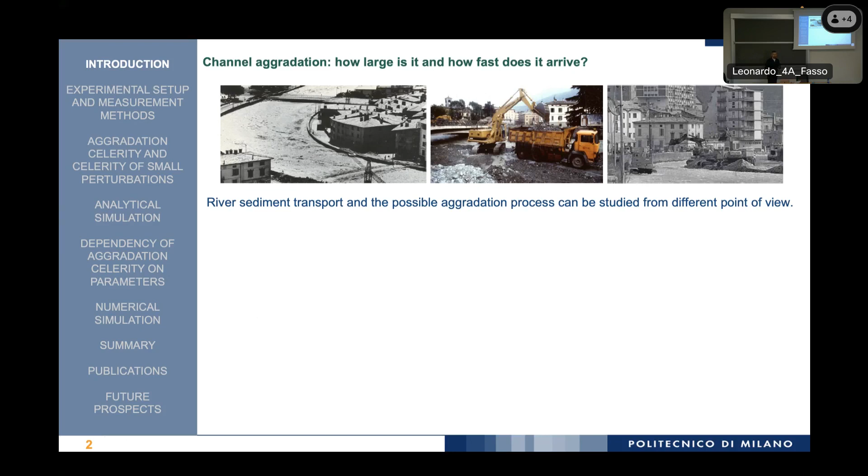These considerations and events like this highlight the importance of studying river sediment transport and possible aggradation processes. This study can be done from different points of view: mathematically, experimentally at microscopic or macroscopic scales, and so on.

What I'm focusing on is listed here: investigating the celerity of propagation of the aggradation wave and the celerity of small perturbations, analytically and numerically simulating the aggradation process, the dependency of aggradation celerity on controlling parameters, and the effect of the presence of sediment transport in a flow. All these investigations are done by performing aggradation experiments in the hydraulic lab of Politecnico di Milano in the Lecco campus.

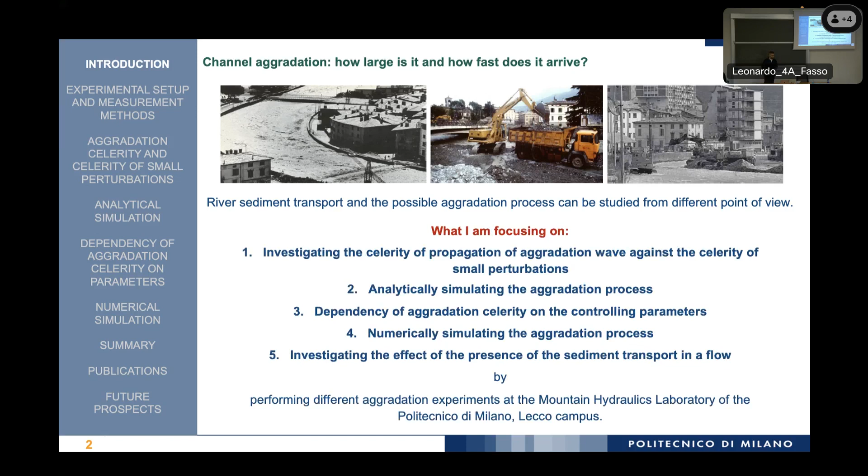Before going into detail with these investigations, I'd like to introduce our experimental setup. Our rectangular channel has an erodible bed with a uniform sediment mixture of PVC. There's a hopper, as you can see here in the upstream part of the channel, that feeds the channel during the experiment. There's also a tank through which water enters the channel during the experiment.

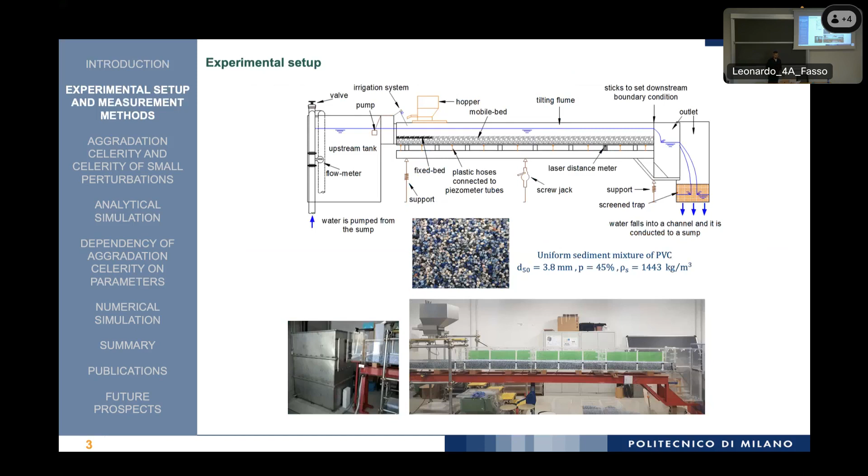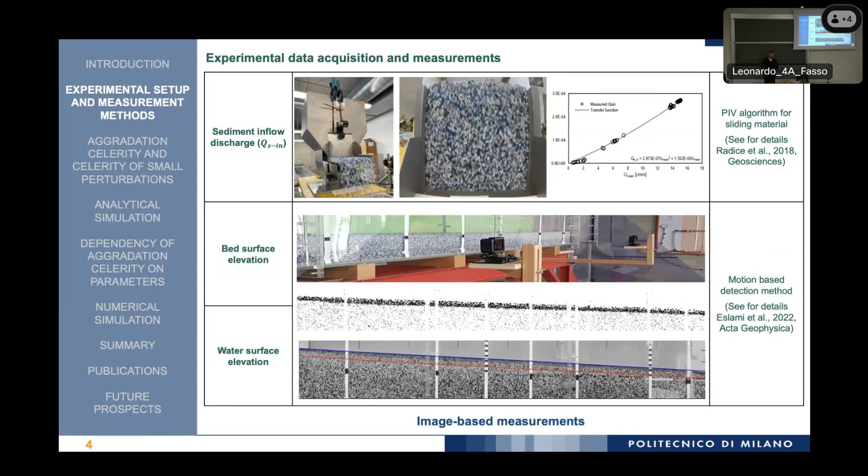Different parameters, including sediment inflow discharge, bed surface elevation, and water surface elevation, are measured using different cameras and by applying image processing methods.

In particular, I'm going to present the results of one experiment, AE4, in this presentation, with these controlling parameters.

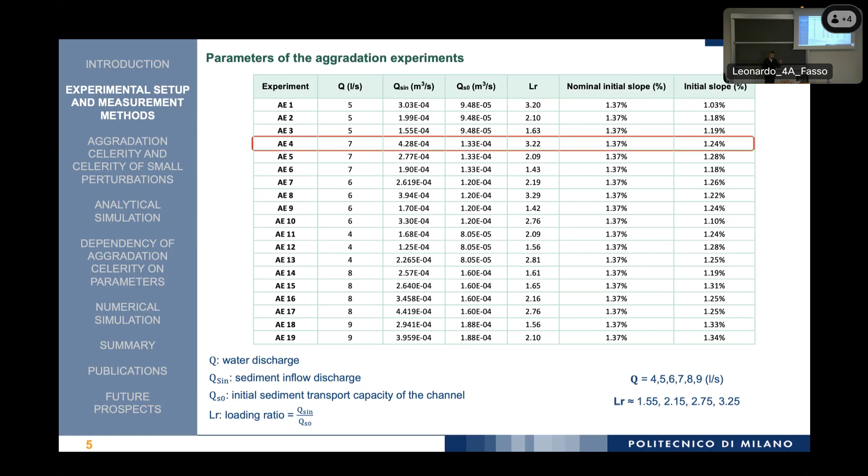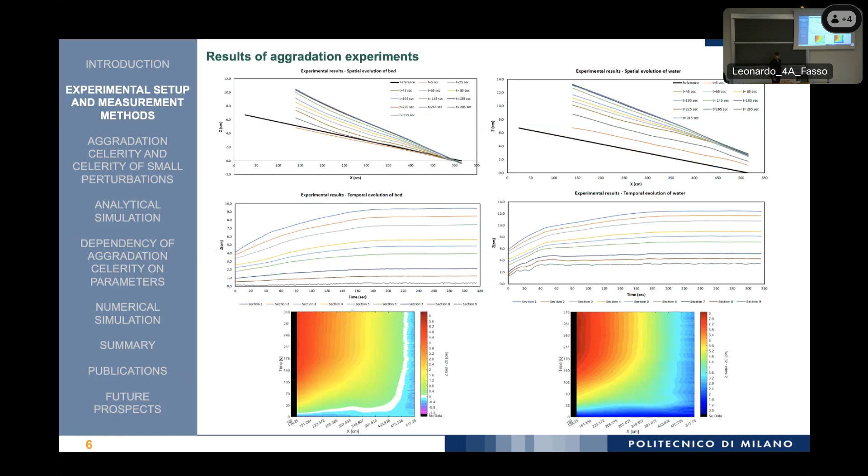After this introduction about the experimental campaign and measurement methods, let's move on to the first investigation. As you know, when a channel is overloaded with sediment, an aggradation wave propagates with a certain celerity along the reach. Knowing this celerity of propagation is crucial from a hazard assessment point of view, because it's important to know when the sediment front reaches a key spot.

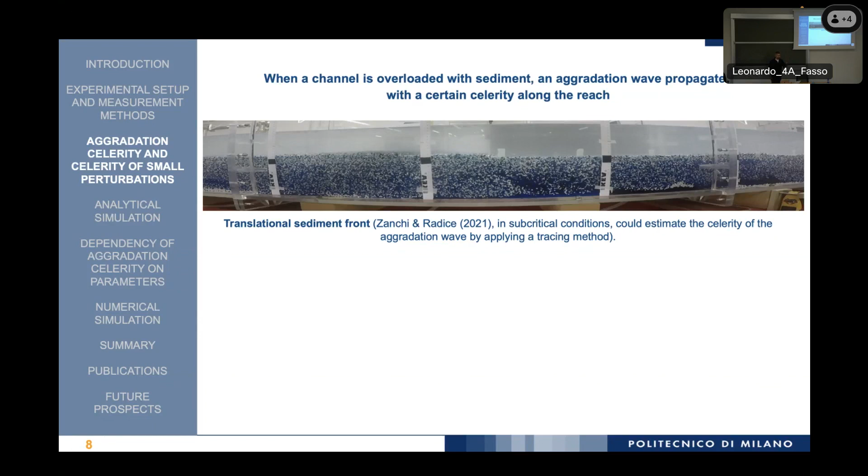When the flow velocity is low, like in this video, the sediment front is of translational type, where a sediment front is detectable, and one can use a tracing method to estimate this celerity.

On the other hand, when the flow velocity is high, mostly in supercritical condition, the sediment front is dispersive type, where there is no sediment front to be detected. So one question that may arise here is how can the celerity of aggradation wave be quantified when the sediment front is of dispersive type?

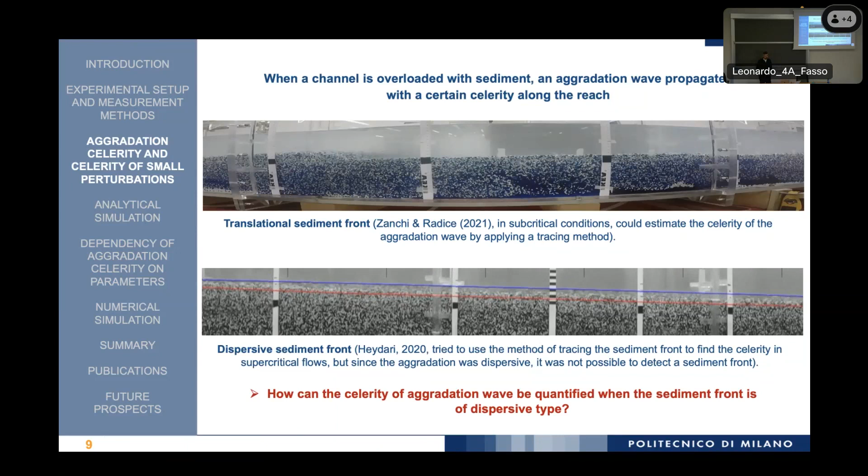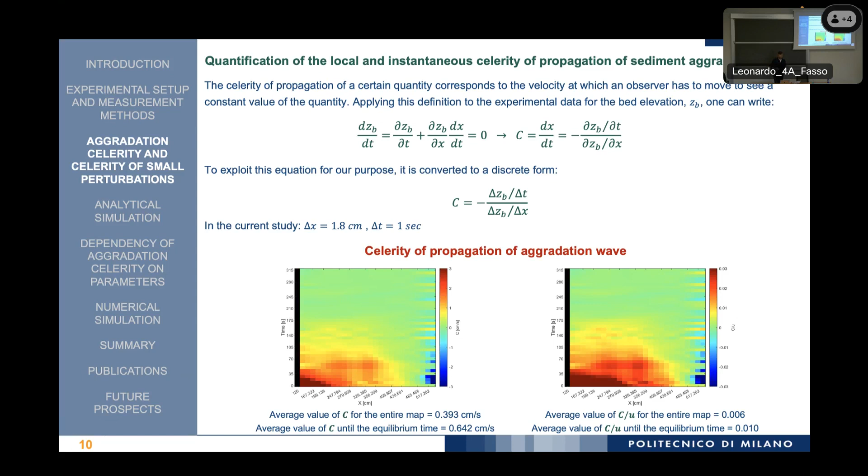Besides this aggradation wave, which propagates with a certain celerity along the reach, there are the so-called small perturbations, which propagate with certain celerities along the reach. So my next step is to quantify this celerity of small perturbation.

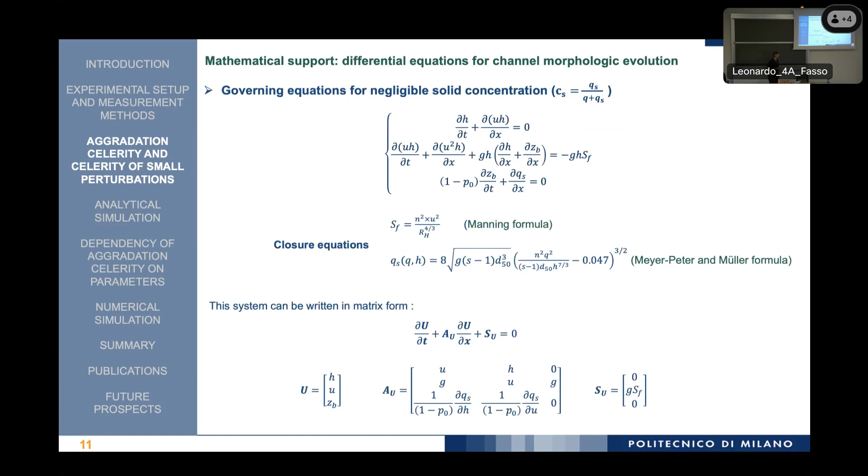However, this system can be written in matrix form, and what's important here for us is this coefficient matrix, because different studies have argued that the eigenvalues of this matrix represent the celerity of propagation of small perturbations in bed and water surface elevation. So in order to find these eigenvalues, it's enough to solve this polynomial equation.

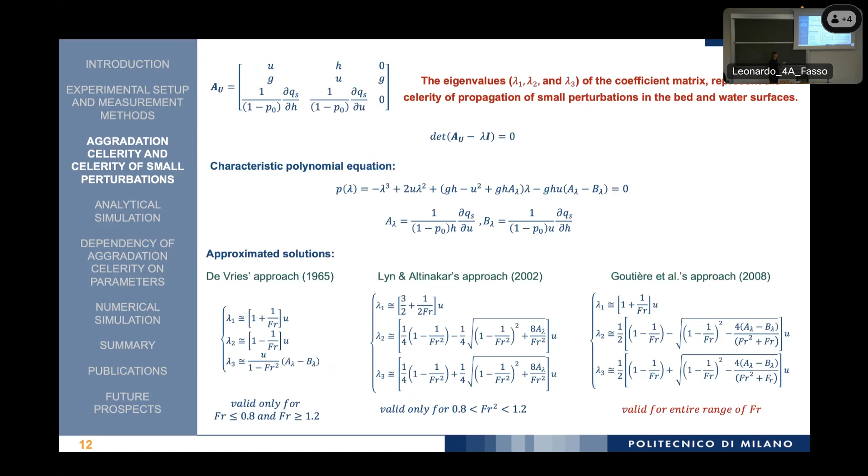There are also some exact solutions for this polynomial equation. Approximated solutions could be useful for interpretation purposes. In this regard, different studies have proposed different equations for these eigenvalues. Among them, we choose the Goutière approach because it is valid for the entire range of the Froude number, and second, it has very good consistency with the exact solution of the polynomial.

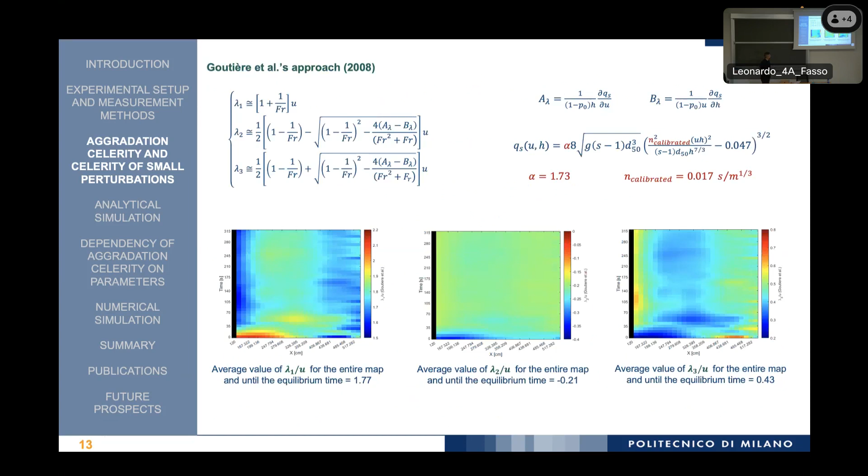However, so far we have been able to determine the celerity of propagation of small perturbations and the celerity of propagation of the aggradation wave. Looking at these graphs, especially the average values, one can say that the celerity of propagation of the aggradation wave is much smaller than the celerity of small perturbations, which is somehow consistent with the concept of the smaller, the faster.

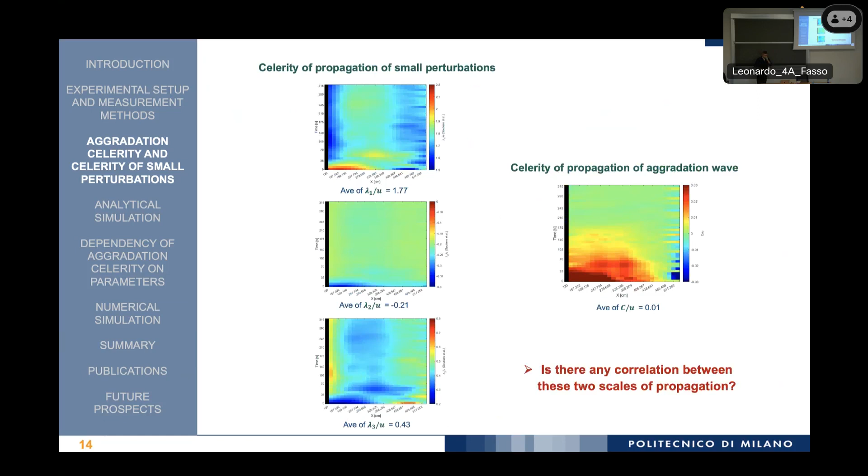Discarding the part of the graphs related to the very initial part of our experiment, where the bed has not been adjusted yet, one can say that there is a correlation between these two scales of propagation, such that the dimensionless celerity of the aggradation wave increases with the dimensionless lambda 1 and lambda 2, absolute value of lambda 2, while it decreases with the dimensionless lambda 3. It's worth mentioning that lambda 1 refers to the propagation of small perturbations in the water surface, while lambda 2 and lambda 3 refer to the small perturbations in the bed surface.

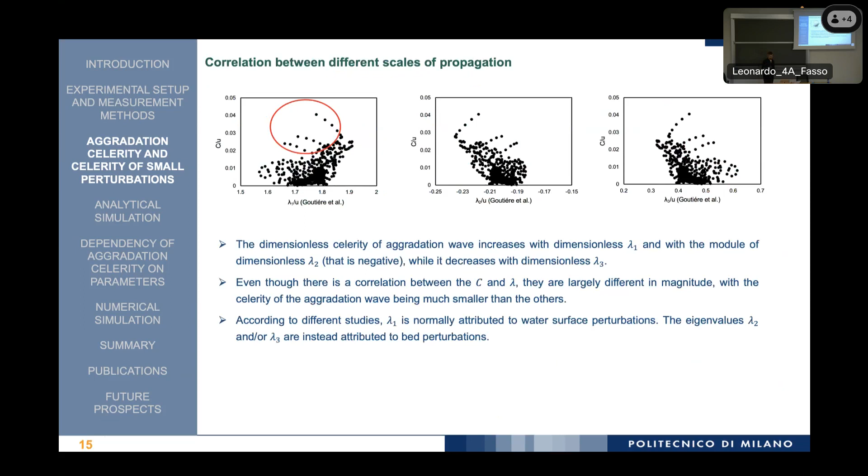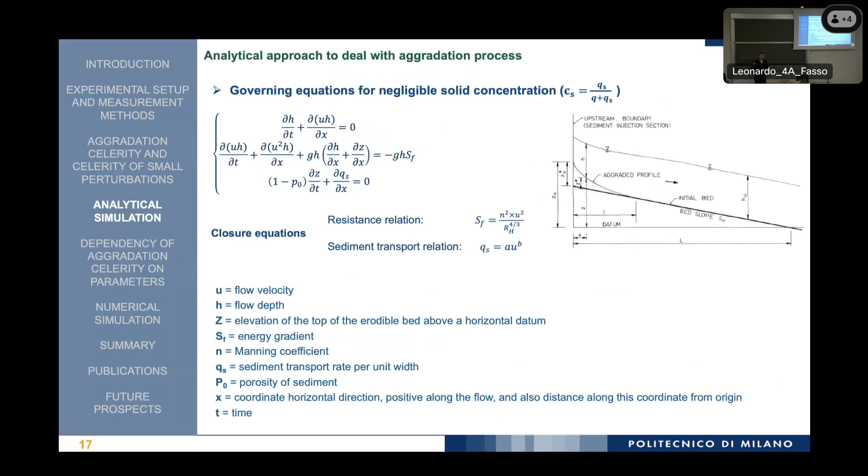Different studies have tried to simplify these PDEs to just one single linear diffusion equation by applying some assumptions. The assumptions are listed here: the flow is quasi-steady, the flow is quasi-uniform, the friction factor is constant, and so on.

However, by applying these assumptions and manipulating the previous PDEs, a linear diffusion equation was derived for the bed aggradation in the channel. Here you can see this equation, where K is called the linear diffusion coefficient. Obviously, by solving this equation, one can obtain the bed evolution during a run for that experiment.

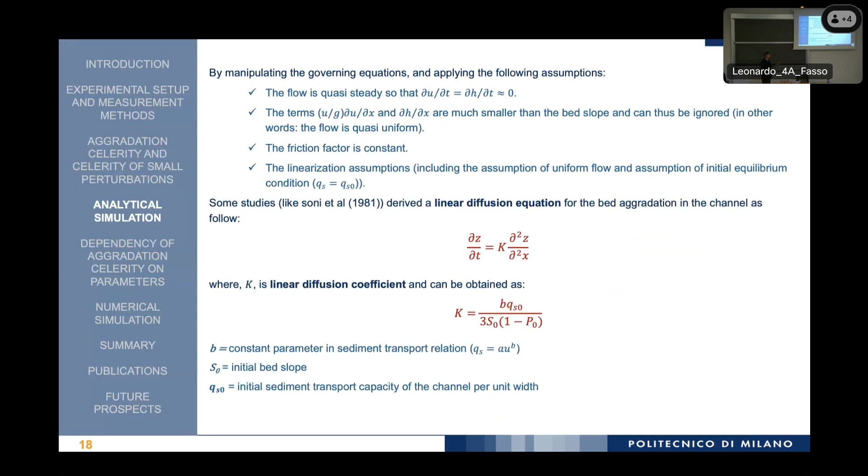Different studies have tried to find an analytical solution for this equation instead of solving numerically. Among them, Gill, by considering appropriate boundary and initial conditions, could find two kinds of analytical solution for this equation: Fourier series solution and error function solution.

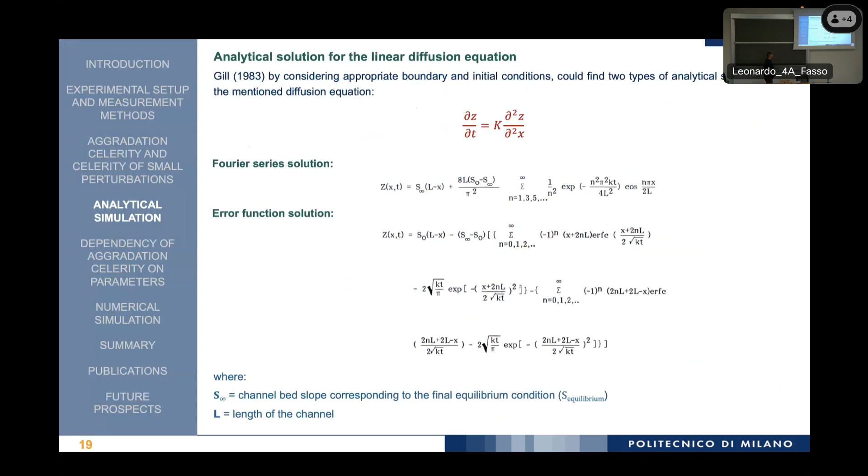We chose the Fourier series solution and applied it to our campaign, to our experiment. The input of this solution, as you can see, is L, which is the length of the channel, S0, which is the initial slope of the channel, S infinite, which means the slope of the channel at equilibrium time, and K, the diffusion coefficient.

S0, S infinite, and L can be obtained during the experiment using image processing methods. But for K, we used for the initial estimation the equation proposed by Gill, shown here. QS0 is the initial sediment transport capacity of the channel per unit width.

Q infinite is the sediment transport rate per unit width at equilibrium time, which would be equal to the sediment inflow discharge, which we are able to obtain using the PIV algorithm, for example.

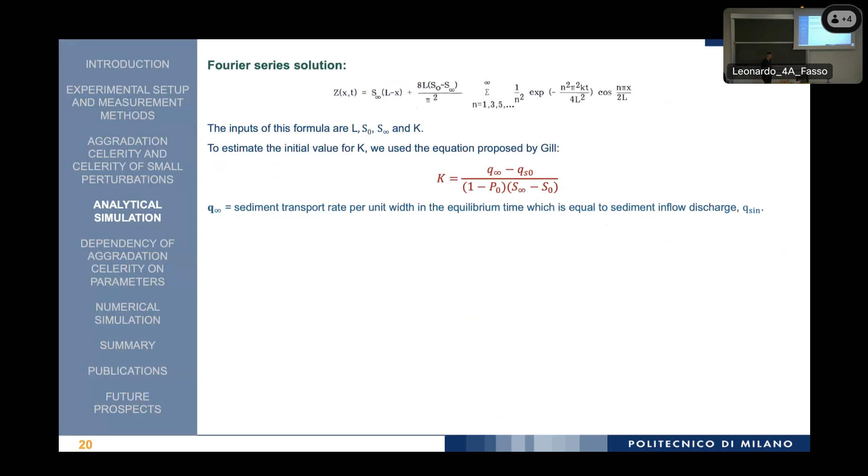By applying this solution to our work, we are able to obtain the analytical solution in our campaign for each experiment. After applying it, you can see here the analytical results for the spatial evolution of the bed and for the temporal evolution of the bed.

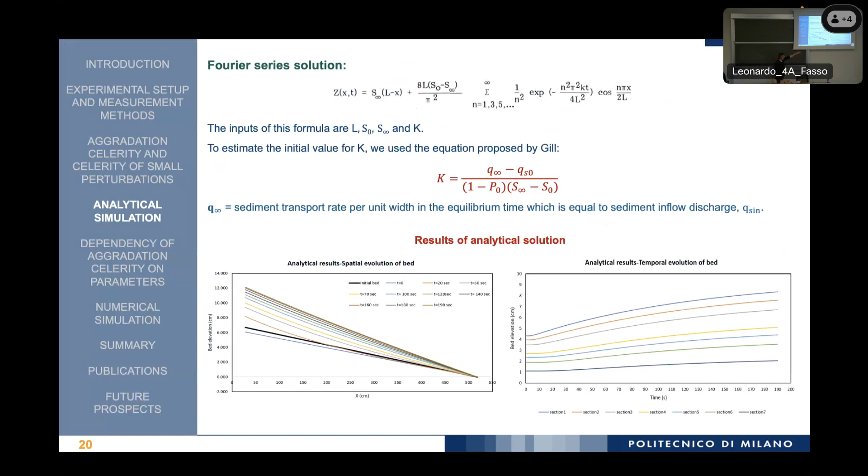The next step is to compare these analytical solutions with the experimental profiles. And as you can see, they are not consistent with each other. So in order to make consistency between the results, we should calibrate the analytical solution.

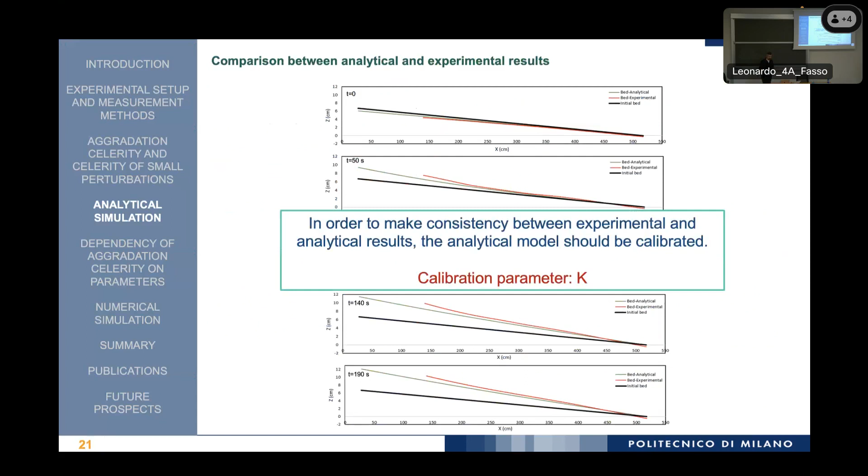The calibration parameter would be K, the diffusion coefficient. After several trials, we could calibrate it, and this is the previous comparison after calibration, where now there is very good consistency between the results.

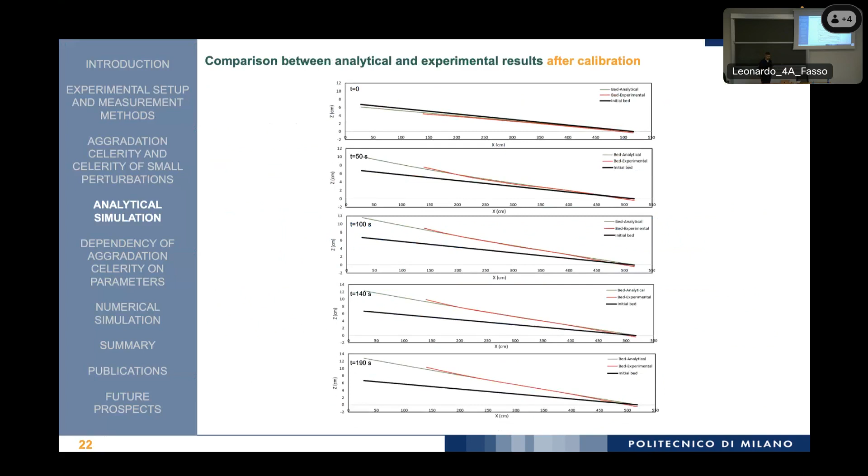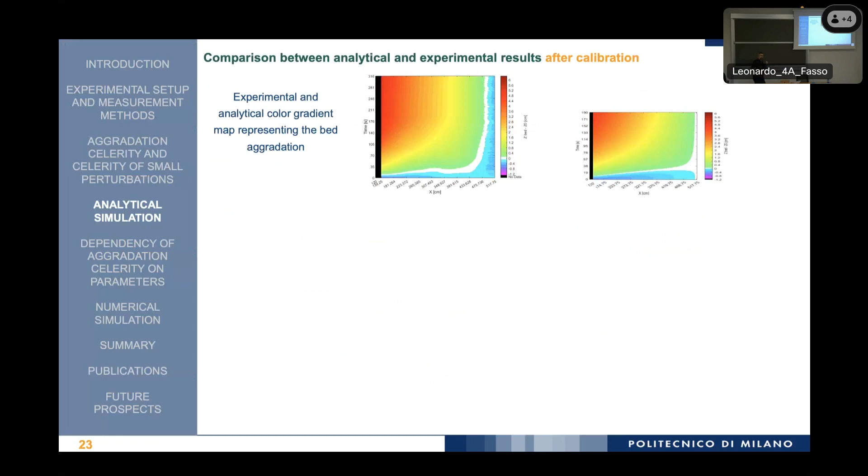However, having this Fourier solution for Z, we apply the standard definition of celerity to this solution as well, and we could obtain the celerity for the analytical solution using this formula. Here you can see the comparison between experimental celerity and the analytical one.

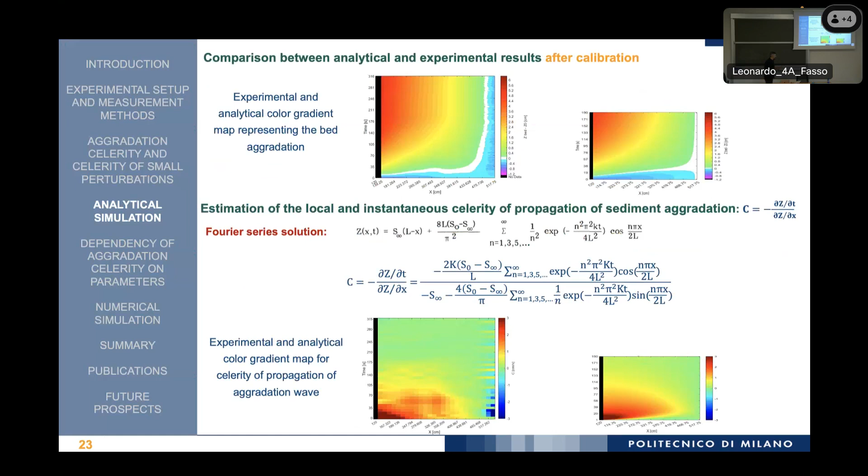This K varies from one experiment to another. So another question arises: does this diffusion coefficient depend on the controlling parameters? Honestly, we have arrived at this point now, and nowadays we are working on this part. So unfortunately, I do not have an answer for this question at the moment. We are now working on it.

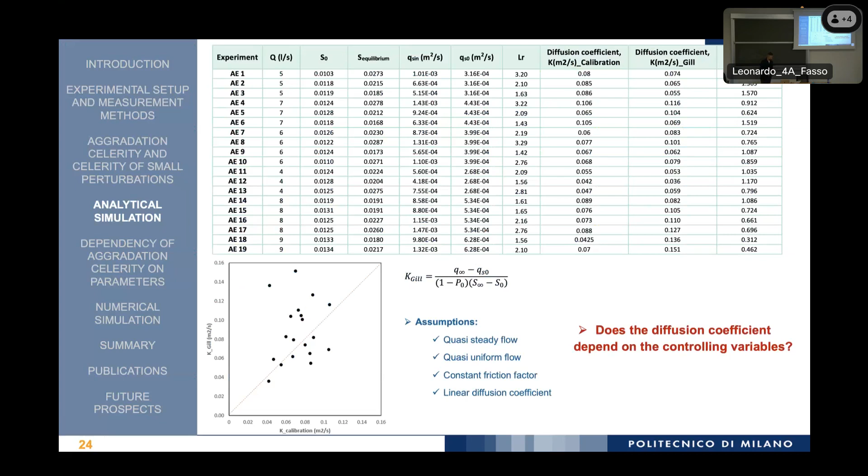In the first part of my presentation, I talked about the celerity of propagation of aggradation wave during one experiment, and we found a correlation between this celerity of aggradation wave and small perturbation, again during one experiment. The aim of this part is to find a representative value for the celerity of propagation of aggradation that represents the celerity corresponding to each experiment.

After finding this representative value for each experiment, we put these values in a graph against the controlling parameters to find out what's the dependency of this celerity on the controlling parameters.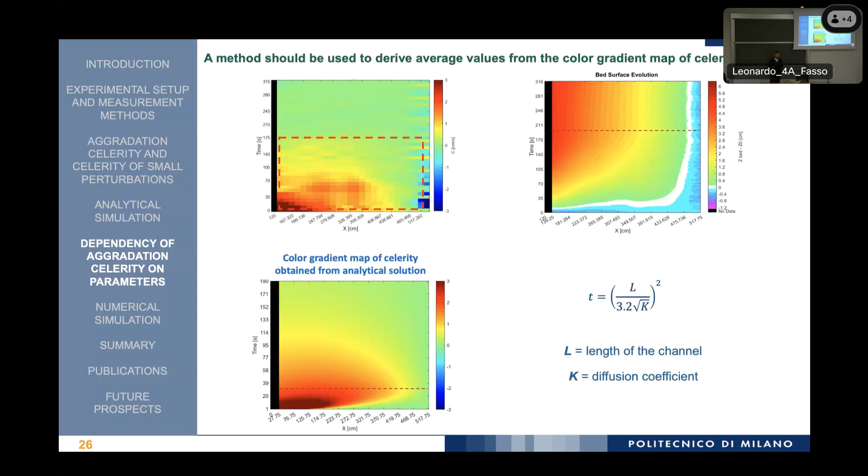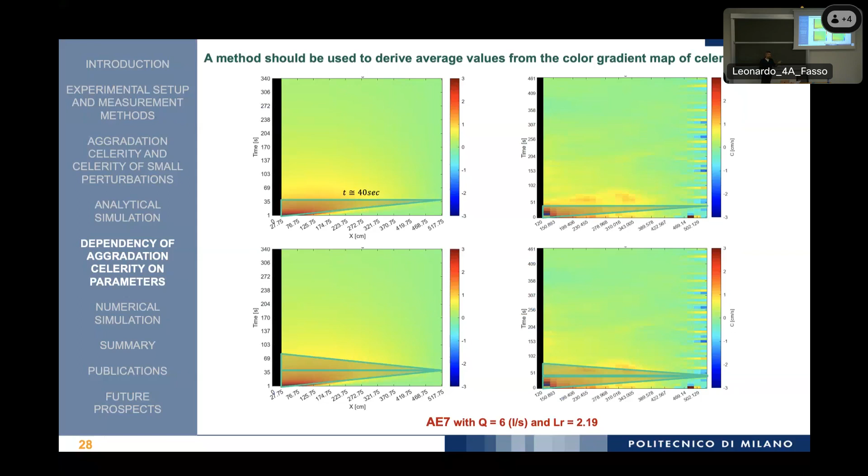After doing this job for all the experiments, we could obtain one representative value for the celerity corresponding to that experiment. We divided it by U, the theoretical water velocity, and then we put it in the graph against the controlling parameters, loading ratio and Froude number.

The reason refers to the fact that it's right that we have increased the Q from 4 to 9, but since our reference slope was constant during all the experiments, the Froude number does not change that much. You can see the range of the Froude number is somehow constant, 1.2 to 1.25. That's why we are not able to see an evident effect of the Froude number on the celerity.

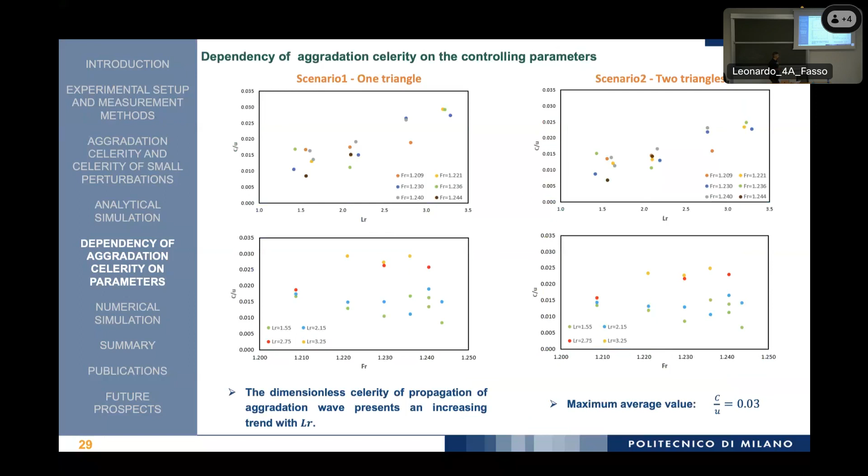And the final point regarding this slide that could be useful for practitioners is that the maximum average value of this dimensionless celerity is 0.03.

The final part of my presentation is related to numerically simulating the aggradation process and the effect of the presence of sediment transport in a flow. I'd like to start this part of the presentation with a question: what is the effect of the sediment transport on the flow resistance?

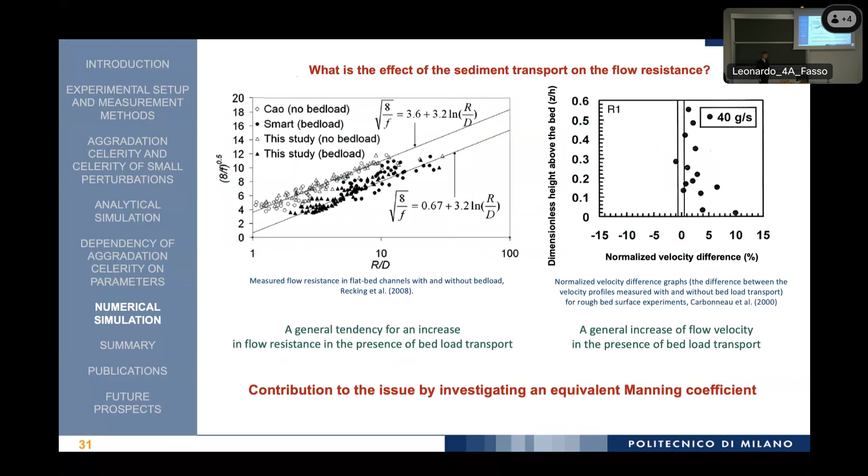It's worth mentioning that the geometry and sediment parameters simulated were exactly the same as the experimental ones. We used two upstream boundary conditions: one for sediment feeding rate, coming from a PID algorithm using a transfer function, and another for water discharge, coming from analyzing the data from the laser installed in the tank.

For the initial value of the Manning coefficient, we used the one coming from the clear water condition, which is 0.015.

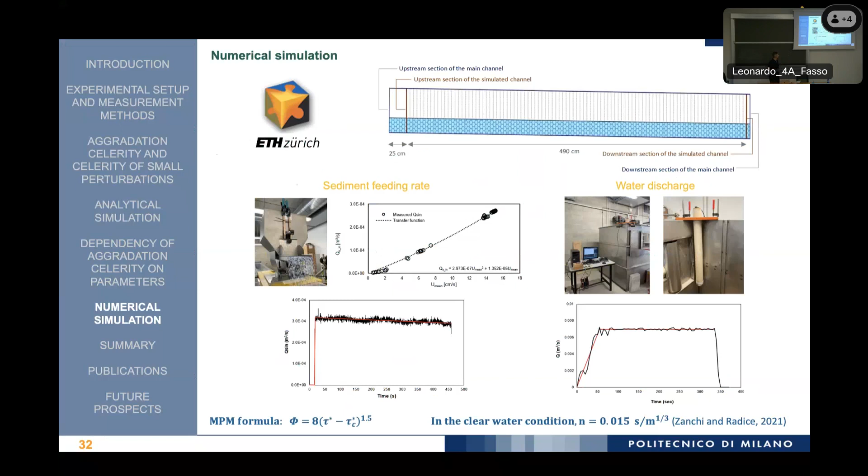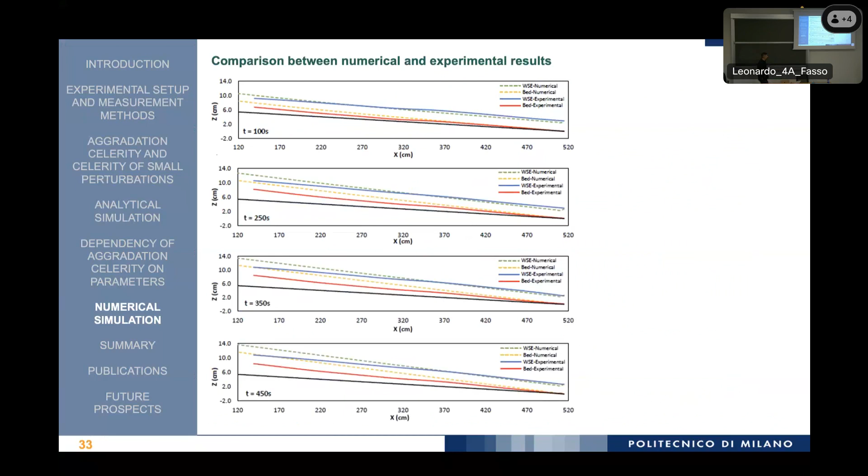So we found out that in order to make the experimental and numerical results consistent, two parameters should be calibrated: the bed load factor alpha, which mostly affects the bed profile, and the Manning coefficient, which mostly affects the water profile.

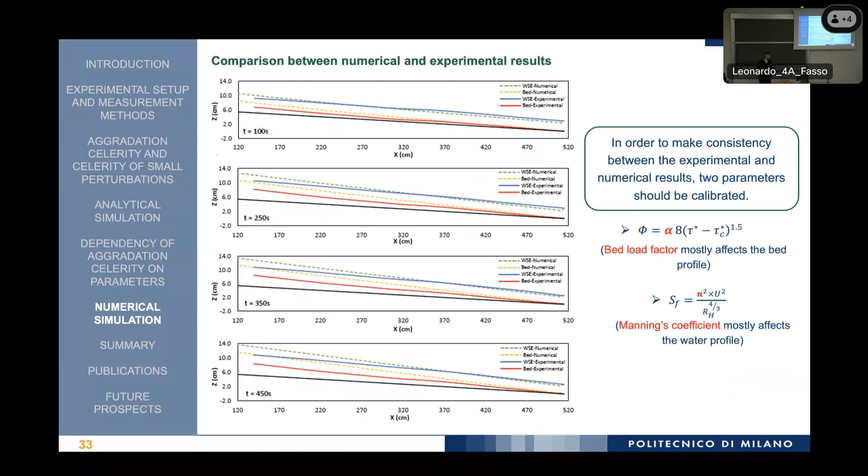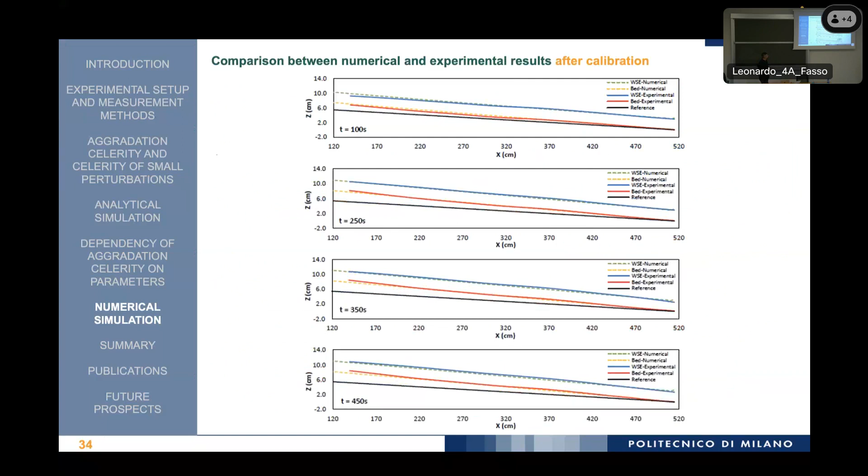After calibration, we compared the results again, and here you can see a good consistency between the profiles. We performed this procedure for all the experiments.

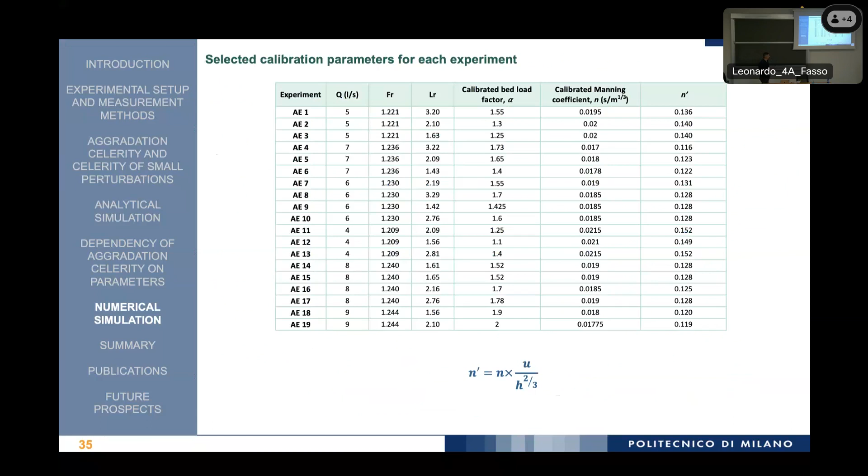Here you can see the amount of alpha and n obtained for each experiment, and in the last column you can see the dimensionless Manning coefficient, which can be calculated using this equation.

That is somewhat consistent with some studies saying that the presence of bed load transport can result in an increase in flow resistance.

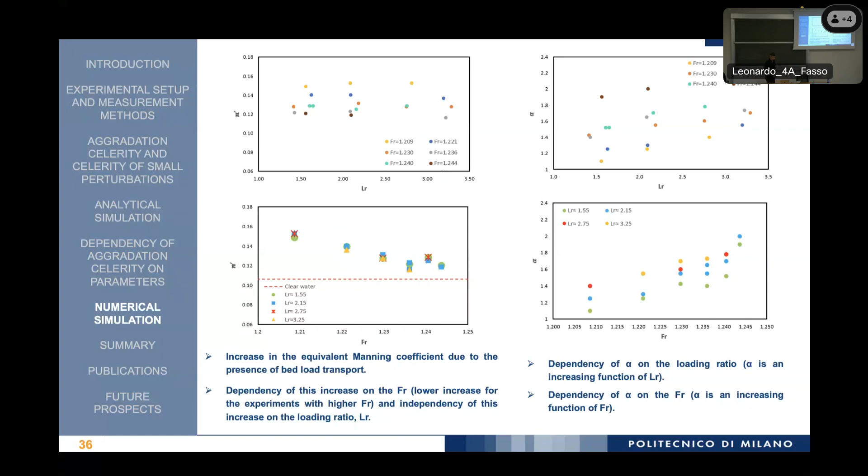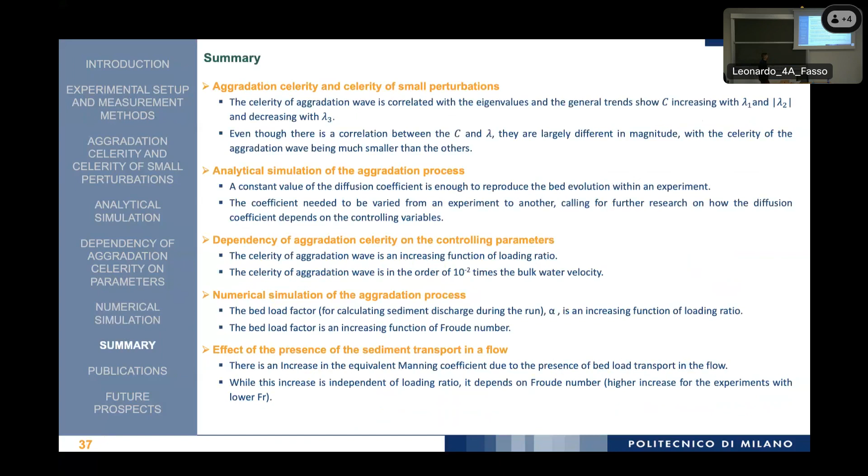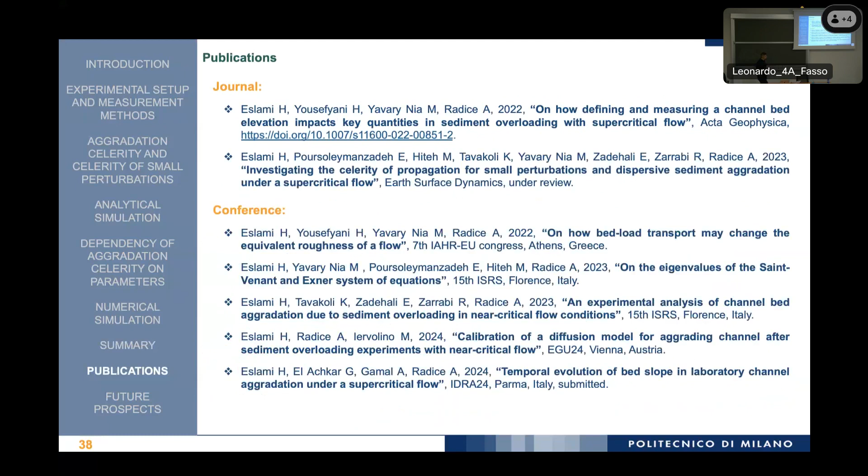As I mentioned, we are also working on investigating the dependency of the diffusion coefficient on the controlling parameters.

Finally, we want to provide a unified view of all the aspects I mentioned. We found some findings regarding each part, but the final step of our work would be devoted to providing a unified approach for all these processes, which could be useful from an engineering point of view and could serve as quantitative tools for practitioners.